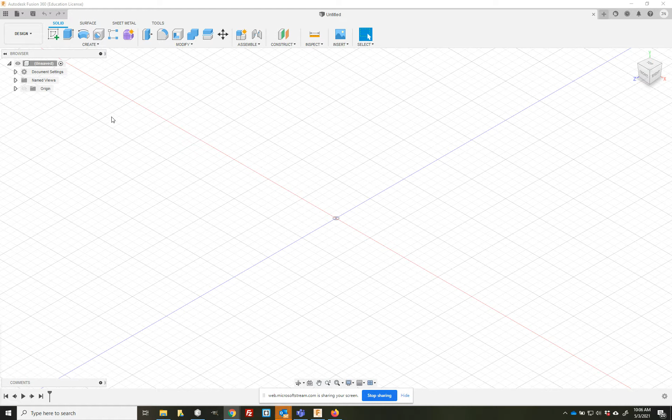All right, so my screen should be shared right now. And the Lego brick dimension is 31.8 millimeters by 15.8. So let's sketch that out. Create a sketch, top bottom plane. Rectangle 2 point, there we go, right there. 15.8, tab 31.8. It's very important that you key in your dimensions so that they are locked.

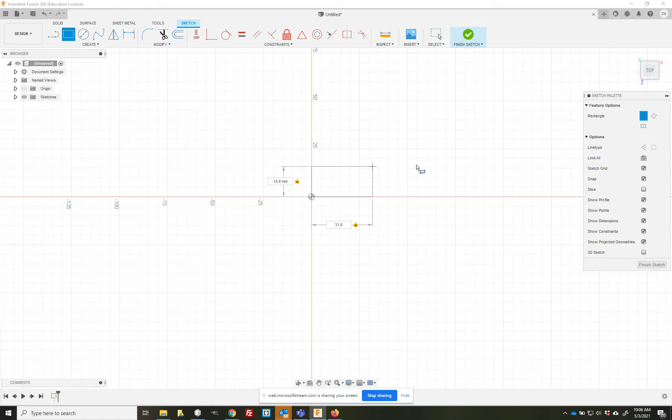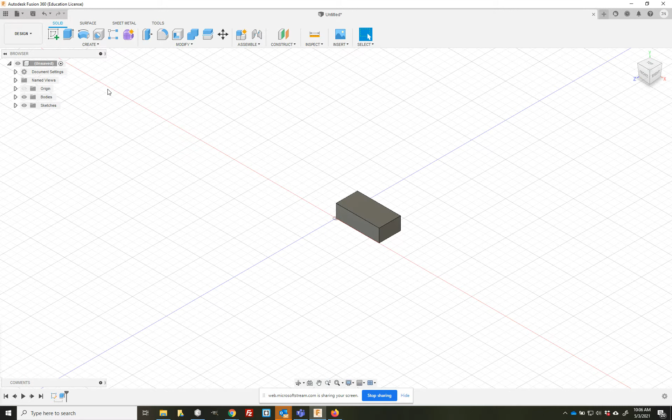All right. Now we're going to hit the E key and I'm going to extrude my rectangle by 9.6 millimeters. And I have my block. Now, the next step I'm going to do is to add my top connectors. So I'm going to create a sketch, top of the brick,

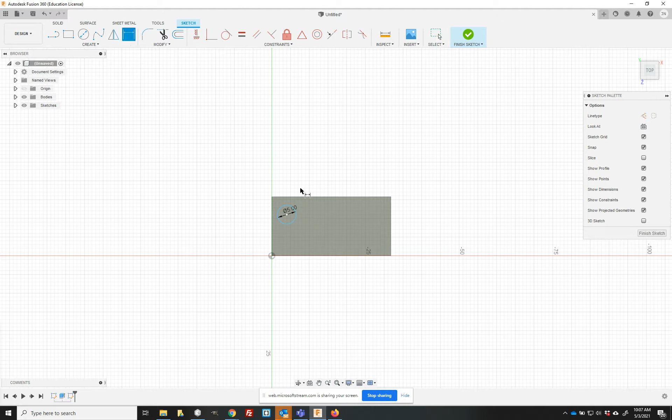zoom in. I'm going to create a center diameter circle. We'll go right down in here, 5 millimeters. Once again, key it in. You want it locked. And there's my circle. I'm going to position that circle 3.9 millimeters from the top and left edges. Notice I am going much quicker and I'm not explaining each click or path. All right, so it's now been positioned.

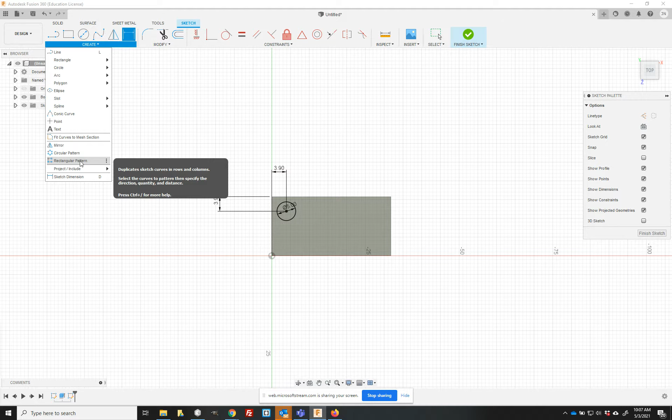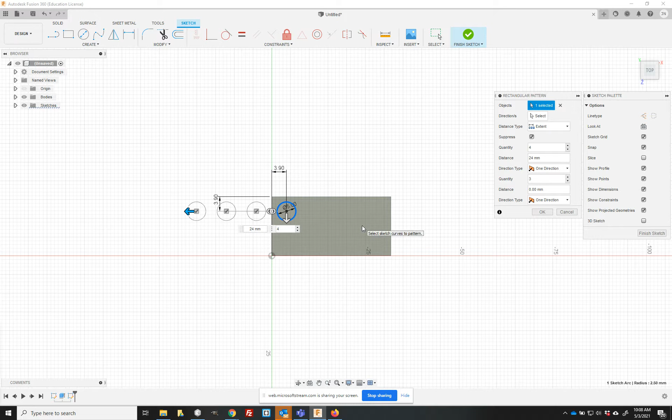All right, let's go ahead and add the rectangular pattern. We'll do it differently in future versions, but for right now, what we're doing, this will be good. Rectangular pattern. All right, the object I'm going to pattern right here. There's my circle. All right, let's grab this blue arrow and let's move this way. I want 4 total. I want them to be 24 millimeters apart. No, sorry, negative 24.

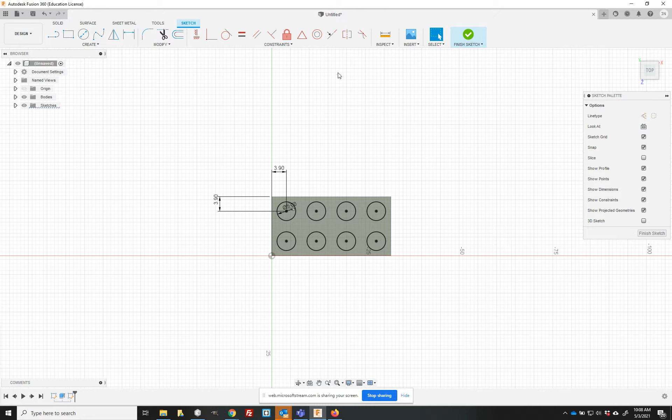I went through the calculation of how we came up with 24 the other day. I'm going to grab this arrow and drag it down. I want 2 rows. I want them 8 millimeters apart. All right, click OK. I'm going to finish sketch. Go to the home position.

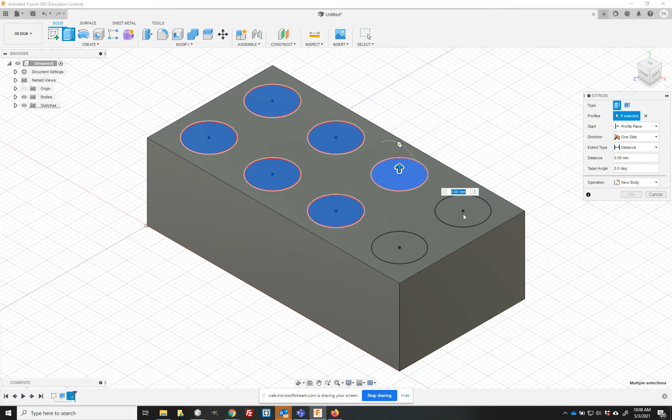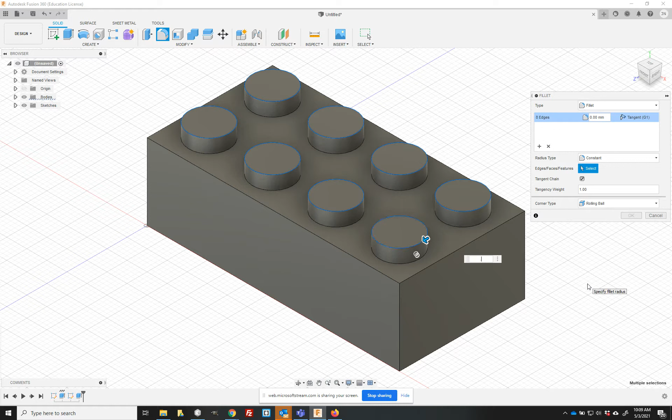I'm going to select my circles and do an extrude. There's my E key. 1, 2, 3, 4. I'm going to catch up. 5, 6, 7, 8. 1.7 millimeters. I'm going to add a fillet each corner. So let's go ahead and hit fillet tool. 1, 2, 3, 4. It's going to be 0.2 millimeters.

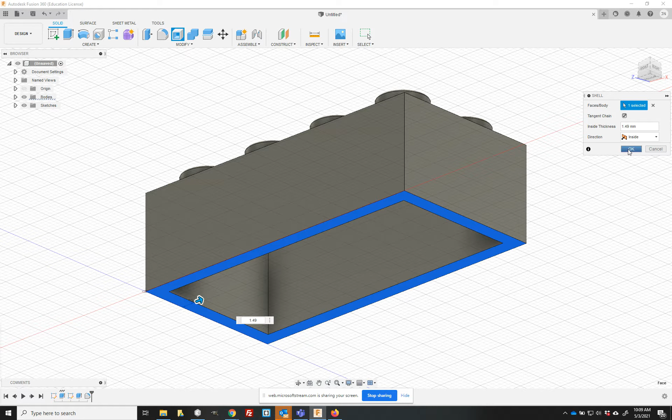Okay. All right, now the next step is I need to shell out the bottom. So let's flip it. Go to the shell under modify there. And the wall thickness is 1.49 millimeters. Click OK. All right, now we're into the bottom view. These circles here represent my top connector. The center point of that circle, which it'll snap to if you're using a tool, is the center point of that top connector.

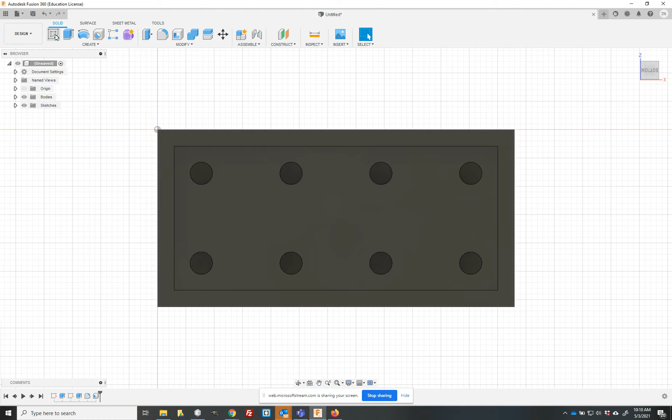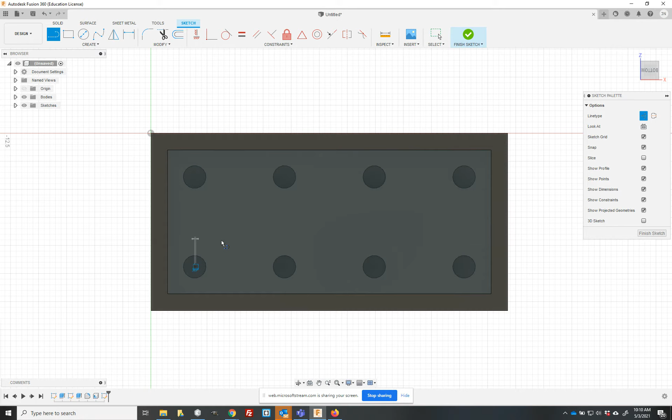Our bottom connector needs to be perfectly centered within the square. All right, I'm going to create a sketch, bottom face. I'm creating the bottom connectors here. So I'm on the bottom face as my plane. First thing I'm going to do is turn on construction because our first connector has to be centered right in the middle of this square. Okay, I'm going to draw a diagonal construction line from the center point here to the center point there. Okay, now escape out of line, there's my line.

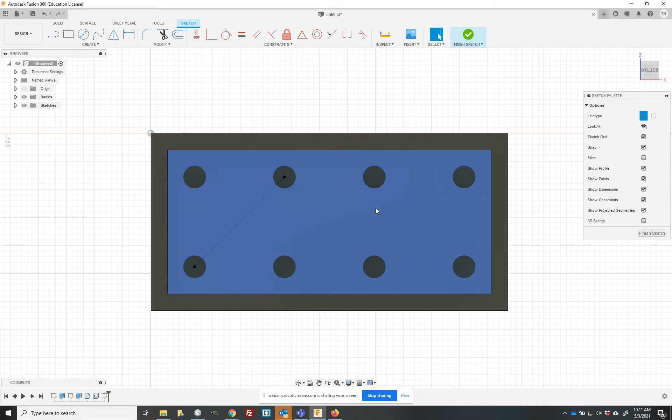If I drew a diagonal from here and here, where they intersect would be the center point. Okay, but I really don't need that because I have this tool that if I go along, it gives me the center point, okay? So I don't need to draw the other construction line. But I don't want that yet. I want to draw a construction circle, one of my top connectors. This is now a 5 millimeter diameter circle. So I'm going to click on the center point, drag it out, 5 millimeters, enter. There is a construction line which represents the full diameter of one of my top connectors.

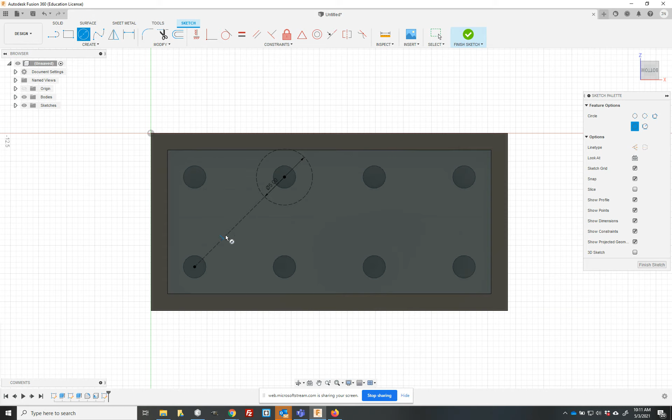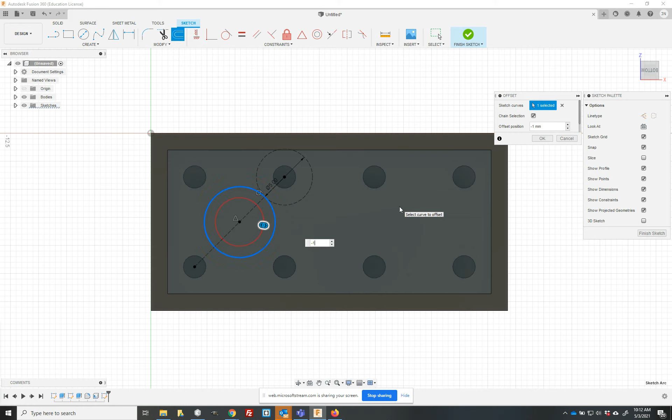I'm going to turn off construction and I'm going to create a center diameter circle. There we go. Machine's running a little slow, got too many things open. There's my center point, click, draw it out, let it snap tangent. See the tangent constraint? Click. That is my bottom connector circle. I'm going to offset it by 1 millimeter. So I'm going to select circle and offset it by -1. And there it is. All right.

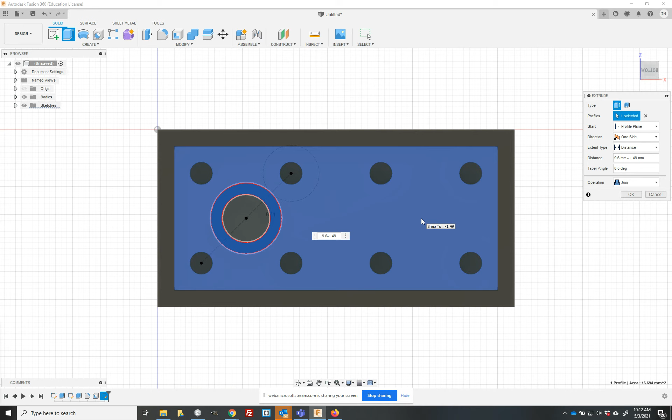Now this time I'm going to extrude it first. So I'm going to hit E. There we go. Select my circle. Now, the height is not 9.6 millimeters because that doesn't account for the wall or the shelled out feature, which means this top surface is 1.49 millimeters. So I need to extrude it 9.6 millimeters minus, notice I'm just typing it right into the dimension box, minus 1.49 millimeters. I can hit enter. And if I go home and rotate it up, it's the perfect height. Now, go back to the bottom.

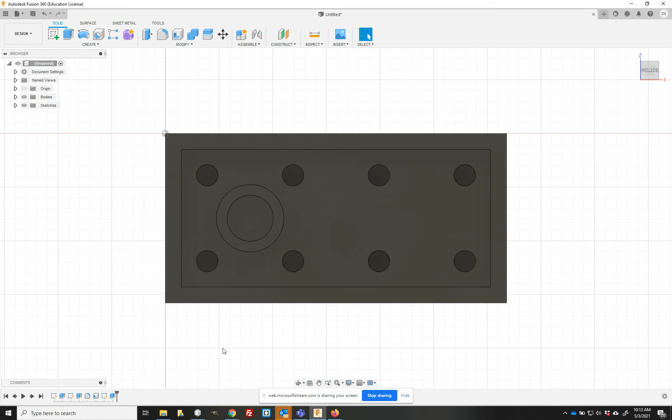I need 3 of them, right? So I want to extrude this. Doesn't look good. We're going to extrude this twice. 8 millimeters to the next one, center point to center point, 8 millimeters to the one after that. So our distance is going to be 16 millimeters. So I'm not going to extrude, I'm going to create a rectangular pattern, but I'm not doing it in the sketch mode. I'm going to do a pattern, rectangular pattern, in my design mode. I'm not doing a face. I'm going to change it and I'm going to do a feature.

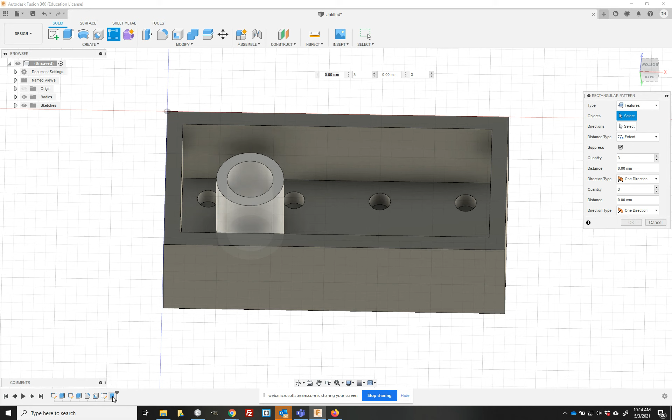All right, remember, we've gone through the terminology here. This is a feature down here in the timeline, okay? So the feature that I want to pattern, I'm going to select it here in the timeline. That's my extrude. There it is, it's selected. I just clicked on it in the timeline. My quantity is going to be 3, and my distance is going to be 16 millimeters. All right.

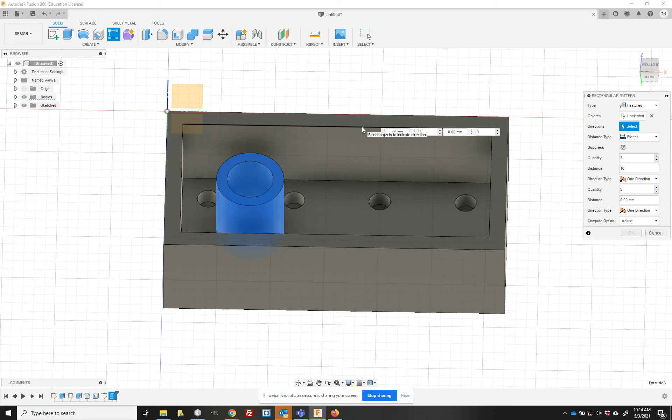Oh, and I need my direction line. An added step when you're doing a design mode pattern. So I'm going to select this edge right here as my direction line that it is going to follow. Click on that edge. And it's projected out. And now I'll click OK. Go to the home button. Guess what? I'm done. All right.